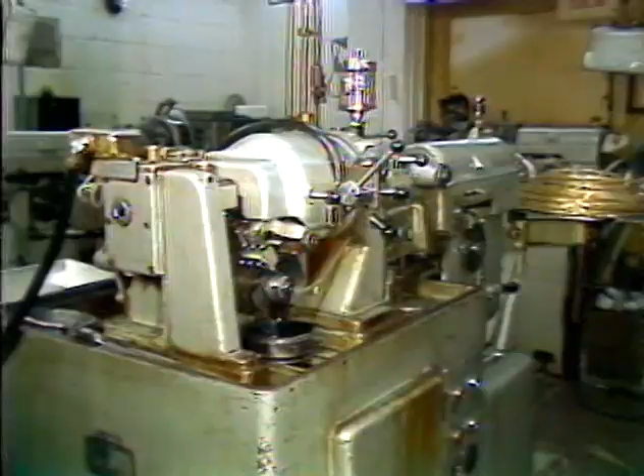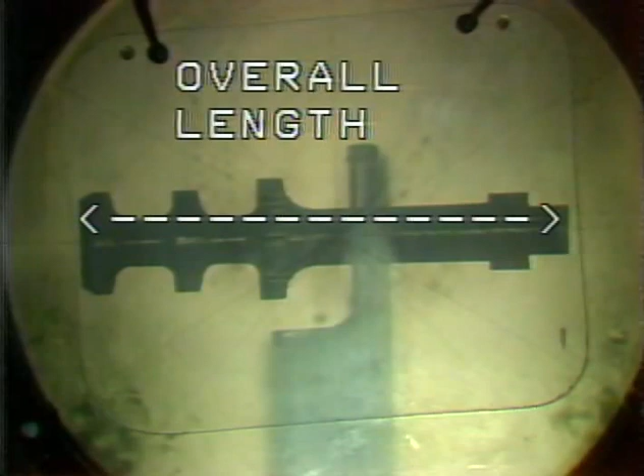After producing a few sample parts from your setup, check each part for proper dimensions against the part print. Check the overall part length and some of the major shank lengths. The major shank lengths are controlled by the feed attachment micrometer stop—these are the first feed out of the first feed cam and the first feed out of the second feed cam. Also check some of the radii.

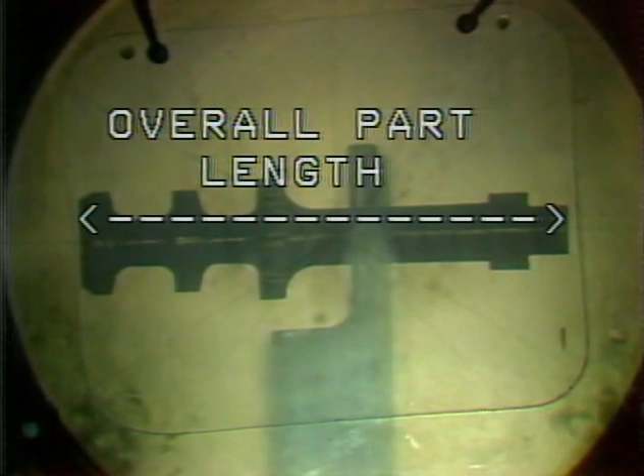The difference between these first few parts and the part tolerances will give you an overall idea of how the setup is producing parts. If only one feed cam is used, first check the overall part length.

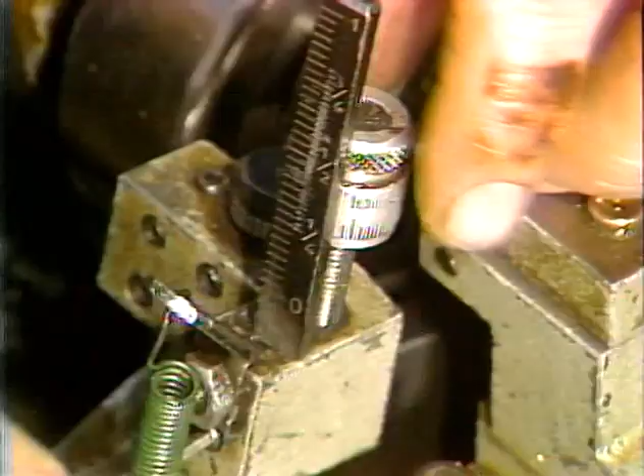Decide if the overall length must be increased or decreased and by how much. The length of the overall part will be adjusted by changing only the length of the first feed out of the first feed cam. If the part length must be increased, turn the feed attachment micrometer stop to the desired amount to correct the length.

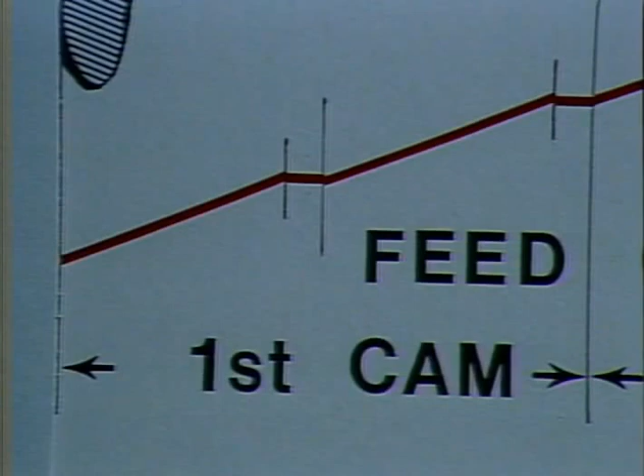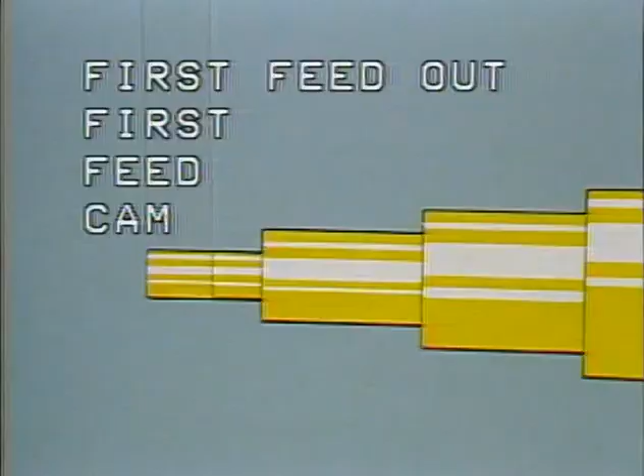This will allow the feed lever to return farther in its cycle, meaning the first feed cam follower will contact the first feed out of the first feed cam earlier in its cycle. The feed rolls will rotate more during the first feed out, increasing the feed out length and the overall part length.

Notice that the overall part length has increased, but only the dimension of the first feed shank has changed.

If the overall part length must be decreased, turn the micrometer stop the desired amount to correct the length. This will shorten the feed attachment return, causing the first feed cam follower to come in contact with the first feed out of the first feed cam later in its cycle.

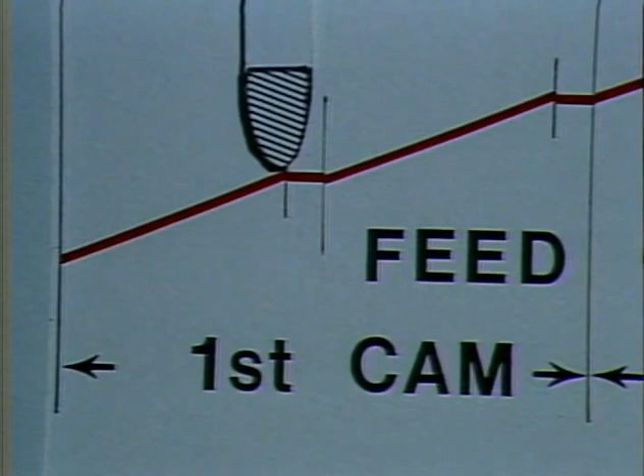The feed rolls will rotate less during the first feed out. The overall part length and the length of the first feed out shank will be shortened. Only the dimension of the first feed out has changed.

All other feed out lengths of the part being produced are fixed by the rises cut into the cam. Lengths and positions of shanks in the body of the part can be adjusted by moving the tool axial position.

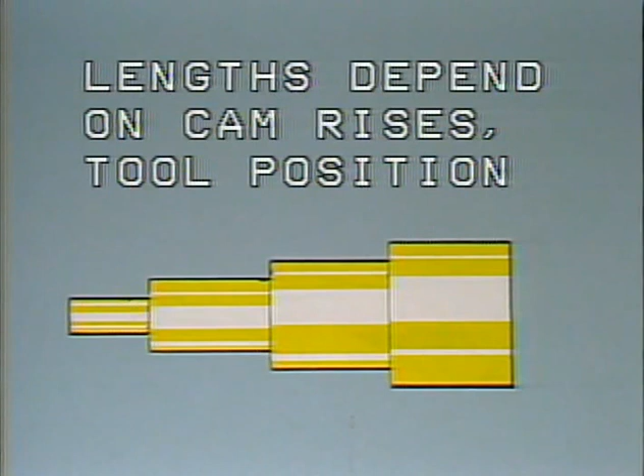If two feed cams are used, the second feed cam follower micrometer can also be used to adjust the overall part length and the shank length within the body of the part. Turning the second feed cam follower micrometer adjusts the length of the first feed out of the second feed cam.

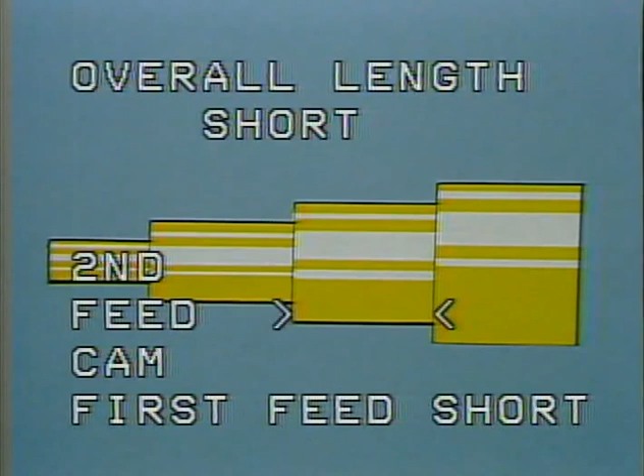If the overall part length is too short because the first feed out of the second feed cam is short, turn the micrometer stop to increase the length. This will cause the second feed cam follower to contact the first feed out of the second feed cam earlier in its cycle. This will lengthen the part.

Notice the overall length of the part has changed, but only the dimension of the first feed out of the second feed cam has changed.

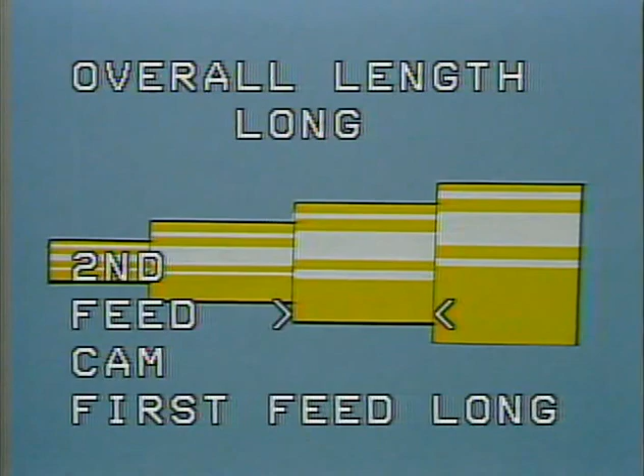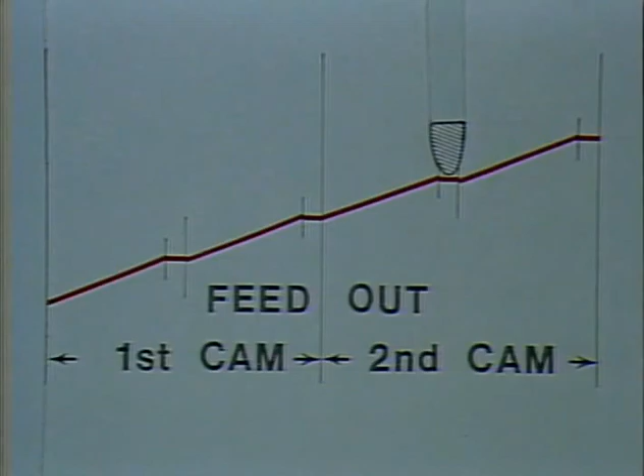If the overall part length is too long because the first feed out of the second feed cam is too long, turn the micrometer to shorten the part length. This will cause the second feed cam follower to contact the second feed cam first feed out later in its cycle. This will shorten the first feed out.

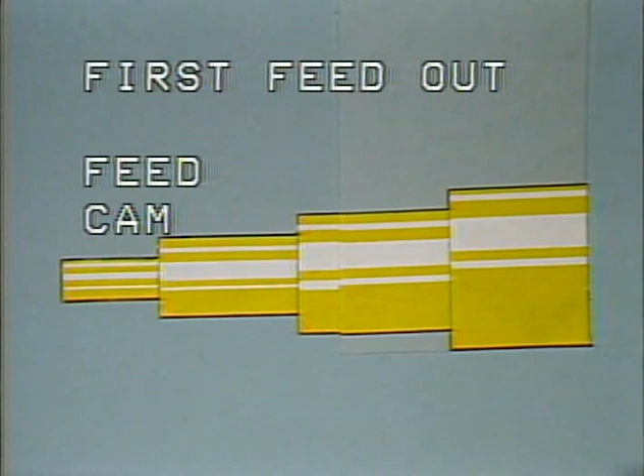The overall part length has been shortened. Only the dimension of the first feed out of the second feed cam has changed.

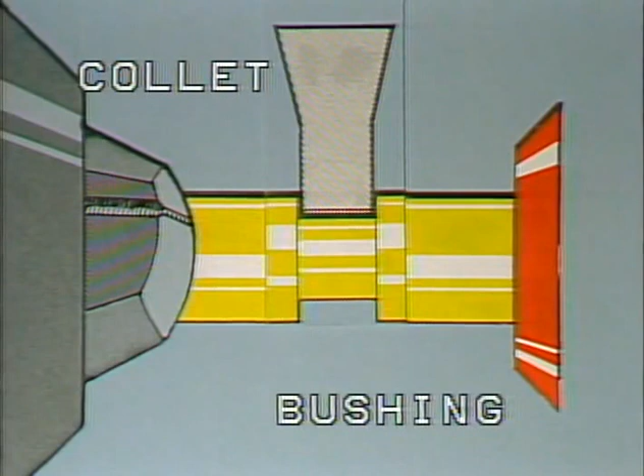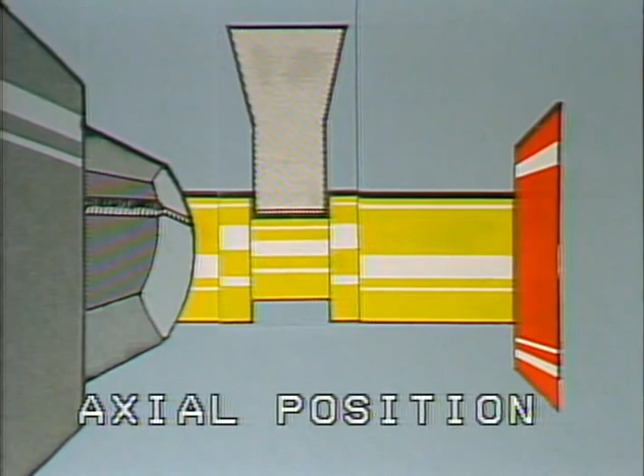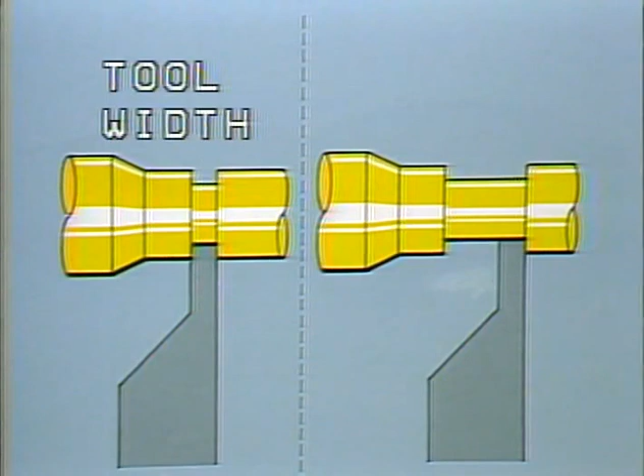With the overall part length correct, check the part for proper shank lengths. Shank lengths and the position of the shanks are controlled by moving the tool axial position. Also tool width, and a combination of tool width and stock feed out, will determine the shank lengths.

Moving the tool axial position toward the bushing will shorten the length of the shank between the tool and the bushing, while it will lengthen the shank toward the collet. Moving the tool axial position away from the bushing will have the opposite effect on the workpiece.

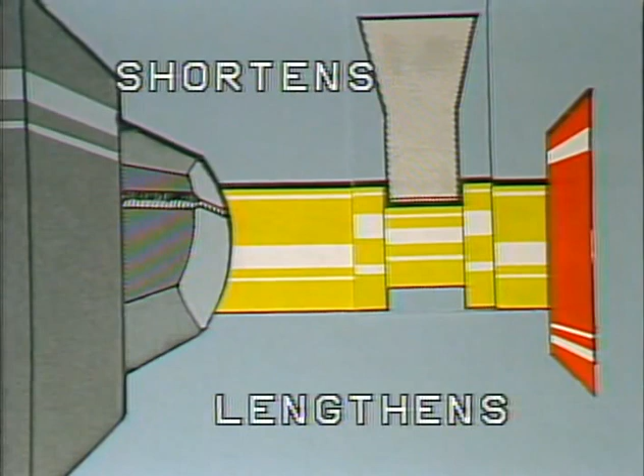Whenever the tool's axial position is moved, the clearance between the tools and the bushing should be checked and reset if necessary. The cutoff tool should be 2 to 4 thousandths from the bushing.

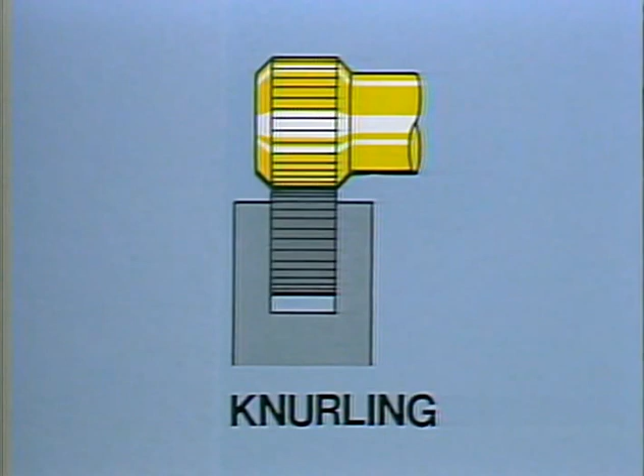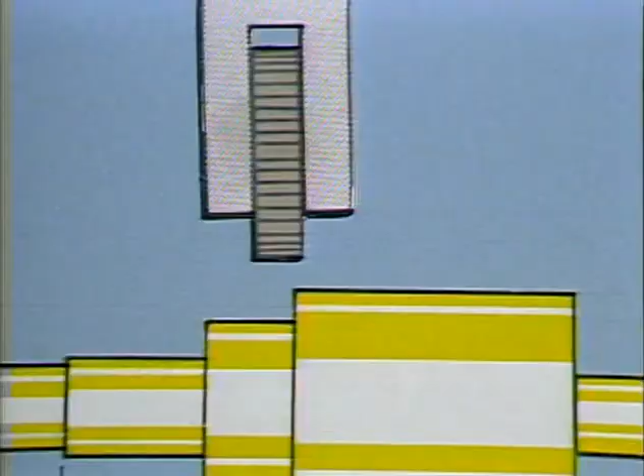If the part is to be knurled, the knurl tool axial position must also be set. Set the knurl tool axial position after the shank to be knurled is properly positioned on the part. Start the machine and allow it to run to the high point of the knurl cam. Stop the machine and adjust the knurl tool axial position to align with the proper shank.

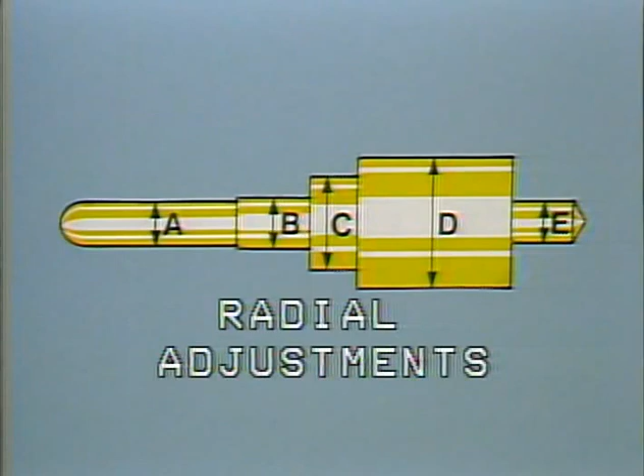With the tool axial position set, the cutting tool radial adjustments can be made. If the tool radial adjustments are more than 5 to 7 thousandths off, the tool safe distance must be reset before the tool micrometer radius adjustment can be made.

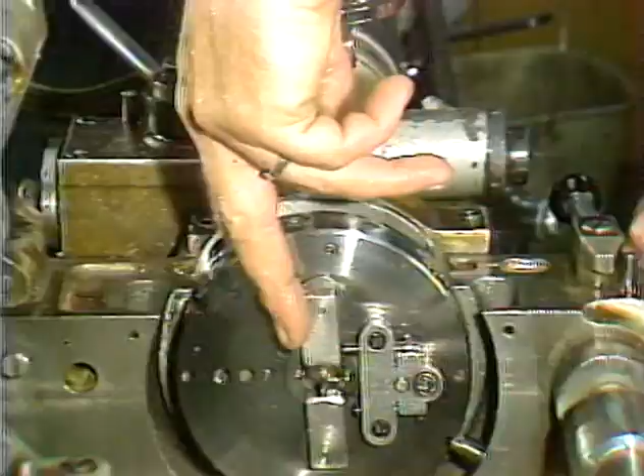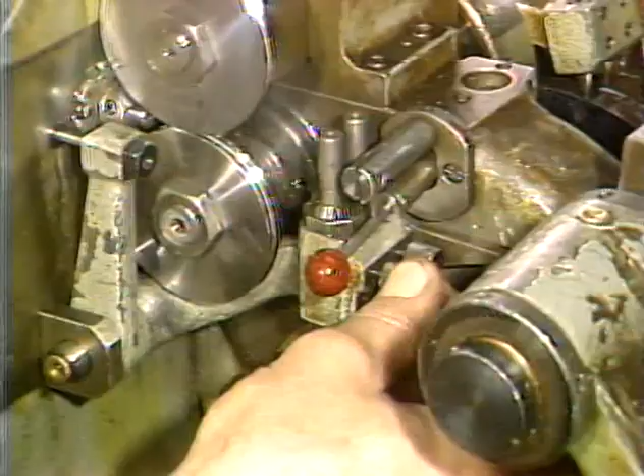You may have to compensate for tool movement when setting the tool safe distance with the distance gauge. With the tool cams at 0, turn the tool micrometer radius adjustment in the direction to correctly affect the part.

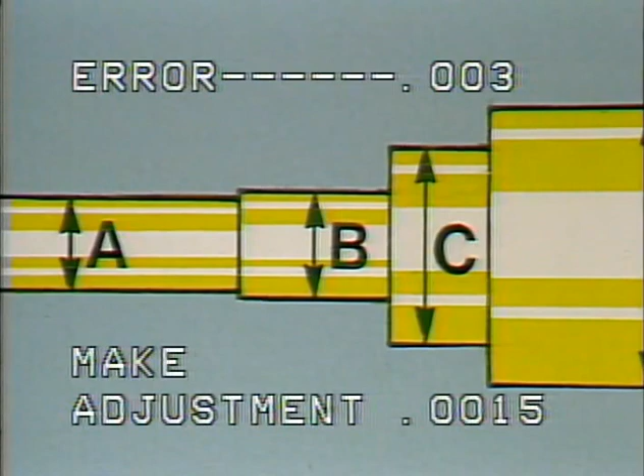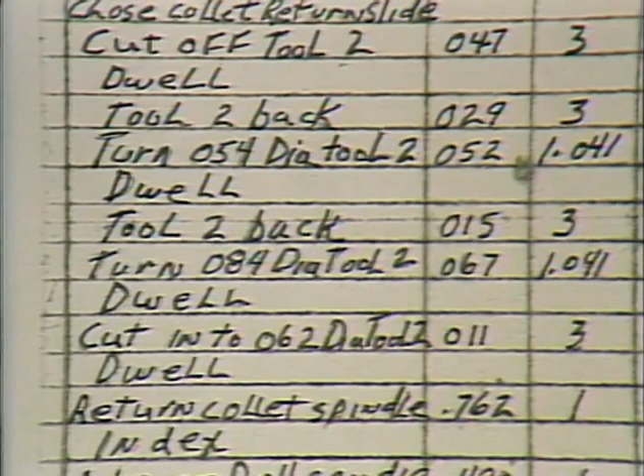Remember, adjust the micrometer by half the amount the setup is in error. Before adjusting the tool micrometer, check the layout sheet to make sure of which tool controls the dimension you wish to correct. Run a few parts and continue to adjust the micrometer until a part meets specification.

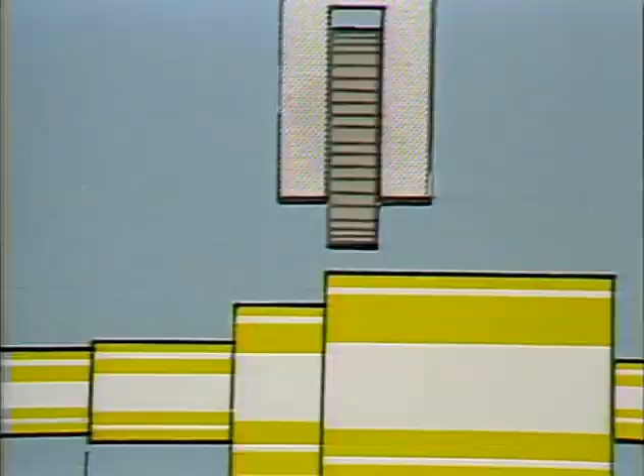Knurl tool radial adjustments can be made after the knurl blank is the correct diameter. First, run the machine to the high point of the knurl tool cam. Stop the machine. Adjust the knurl tool micrometer while holding the knurl tool counterbalance against the cone, until the knurl wheel just touches the part.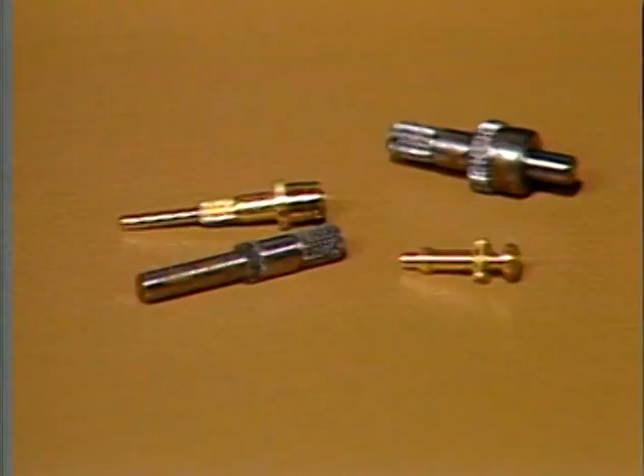Restart the machine. Run a few parts. Check the knurled portion of the part for proper dimension. Also check the part for the quality of the knurl. The knurl should be clean cut with no mashed or stripped spots. A knurl tool adjusted too deep will strip the knurl off the part.

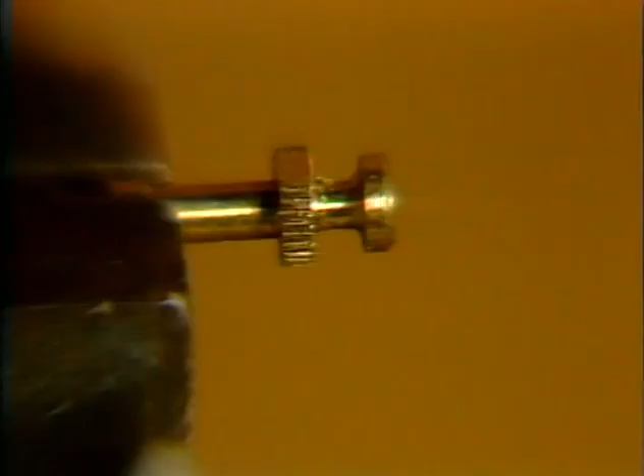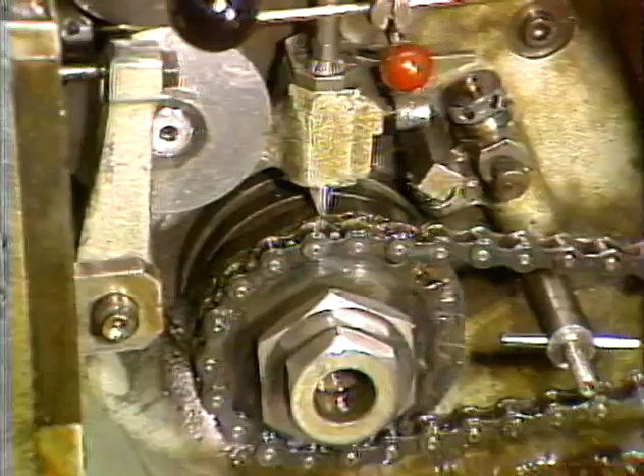To control a part diameter on some jobs, the tool cam number 2 positive stop may be used. This is usually specified on the layout sheet. Tool cam number 2 for this type of job is usually cut 2 to 4 thousandths lower than needed to cut the part. First, run the machine until tool cam number 2 is at low point.

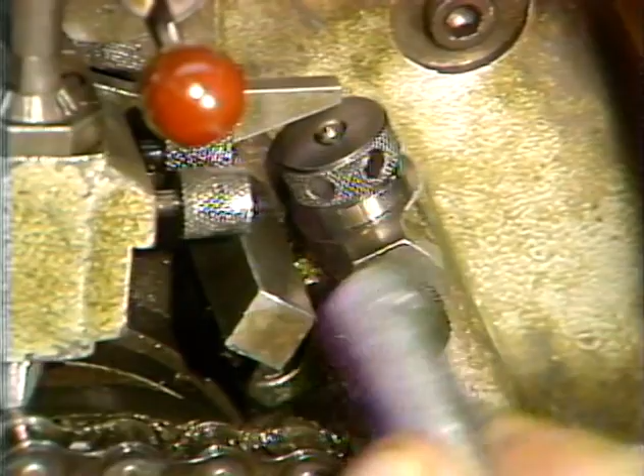Push the hand wheel in to stop the main camshaft. Adjust the positive stop to contact the positive stop lever. Continue to turn the micrometer another 2 thousandths.

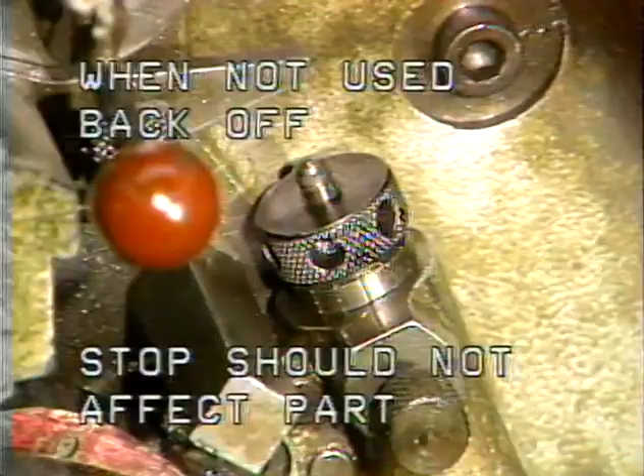Restart the main camshaft. Run the part and check the dimension on the part the positive stop was used to control. You can make fine adjustments while the machine is in operation. If the positive stop is not to be used on the job, make sure it is backed off far enough not to interfere with the normal operation of tool cam number 2.

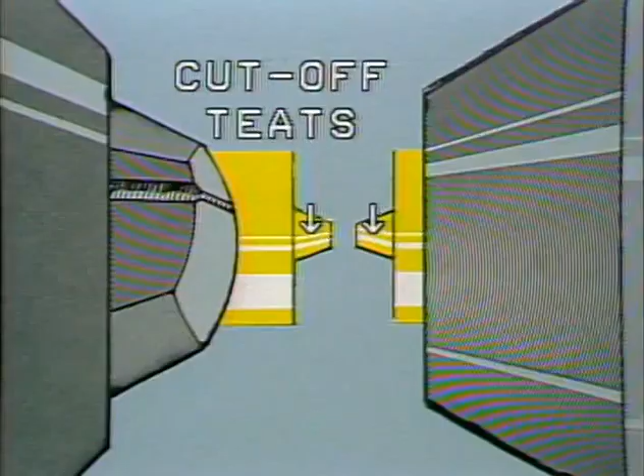When running the parts, also check the ends of the finished parts for cut-off teats. Also check the end of the stock and the bushing for cut-off teats. Some parts may have cut-off teats on both the collet and bushing side of the part. This may be caused from a poorly centered tool,

or insufficient travel of the cutoff tool past the center of the part. The cutoff tool may also be in poor condition. The cutoff teat on the collet side of the part may be caused from a cutoff tool in poor condition, or the collet may need further centering to the stock guide bushing.

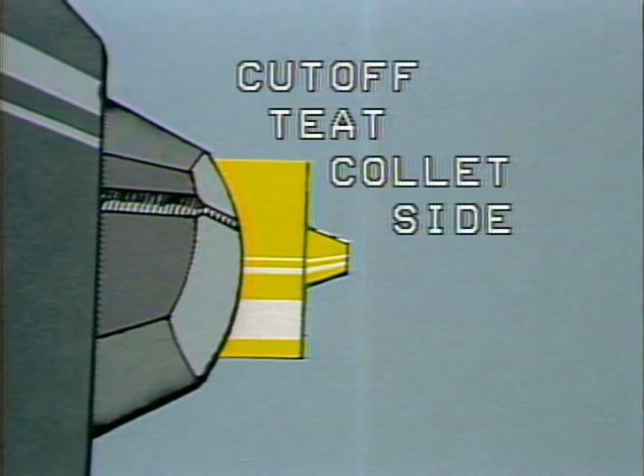A cutoff teat on the collet side of the part can mean a cutoff tool in poor condition, or the stock guide bushing may have too much play.

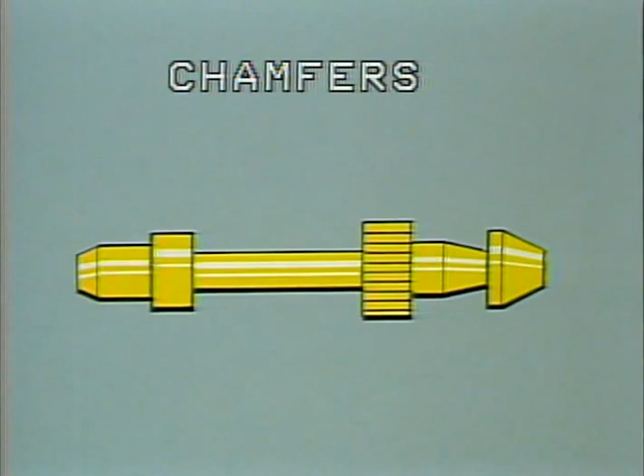Some parts may also require chamfers to be formed on the part. The chamfers should be checked for the right width, angle, and eccentricity. An eccentric chamfer is one that is not the same width around the part.

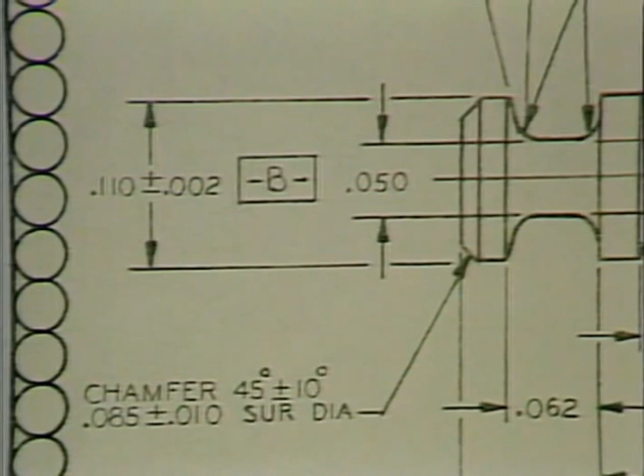The width of a chamfer can be controlled by the tool radial adjustment and by the tool axial adjustment. An eccentric chamfer on the bushing side of the part may be caused by the stock guide bushing with too much play, or a guide bushing that is worn unevenly out of round.

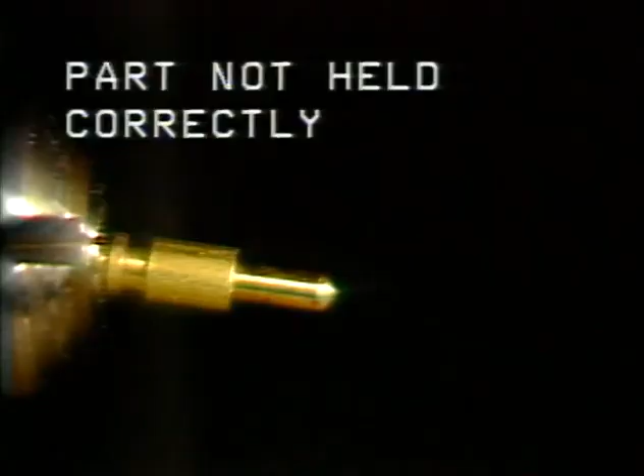A chamfer may be eccentric on the collet side. This may be caused by the collet not gripping the part firmly, or an enlarged collet which will not allow the part to be gripped correctly. Incorrect collet centering will cause an eccentric chamfer as well.

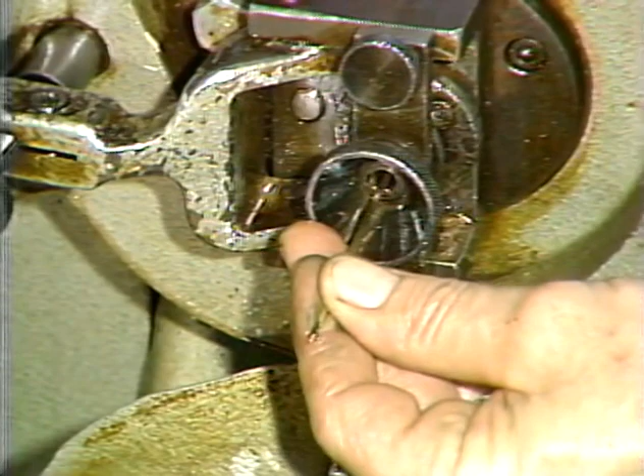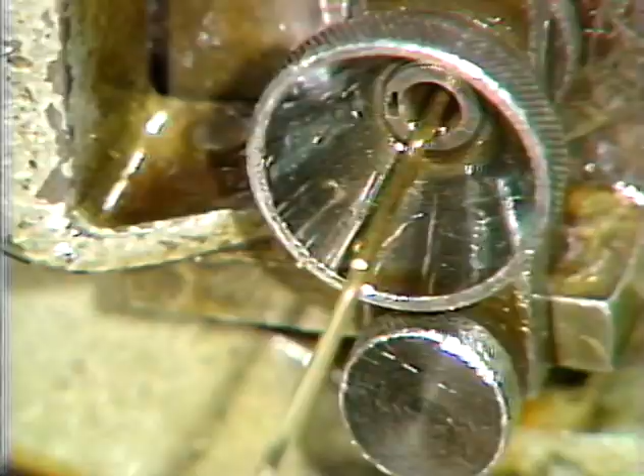To check which way the centering correction should be made in relationship to the collet on the Model D2, feed the stock through the collet and out of the back of the collet. Mark the top of the stock that extends out of the collet with a knife or file. Run the part.

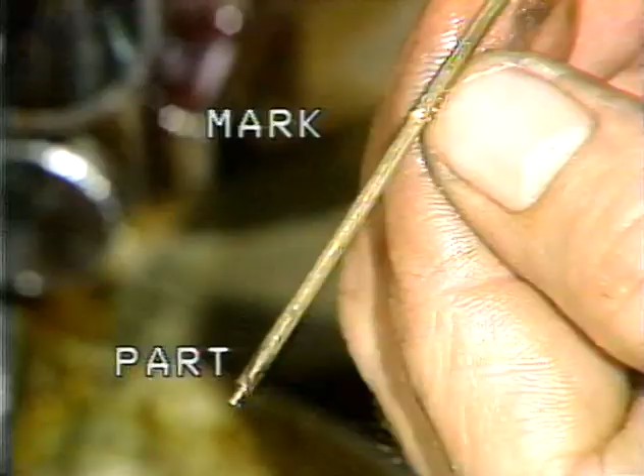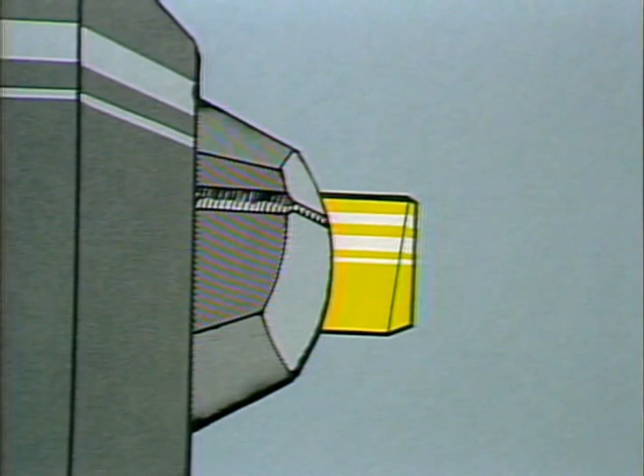Check the part on the end of the cut-off stock. Where the uneven chamfer shows up in respect to the mark on the top of the stock indicates which direction to move the collet. Move the collet in the same direction as the smaller chamfer, using the mark on the top of the stock as a reference.

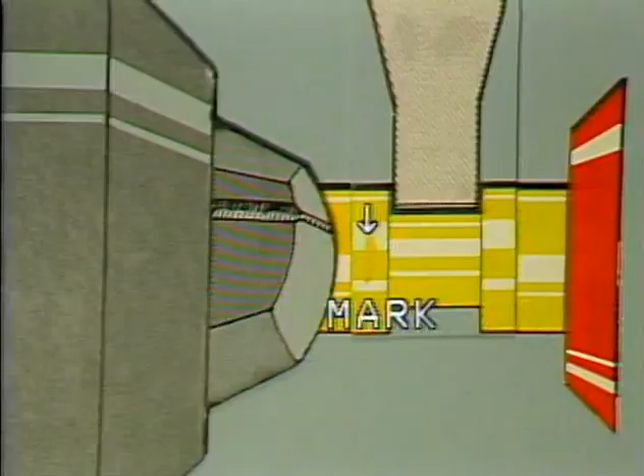The same check and adjustment can be done on the Model D4 by stopping the machine before cutoff and marking the top of the part in the tooling area. Then finish running the part. Move the collet in the direction of the smaller chamfer, using the mark on the top of the part as a reference.

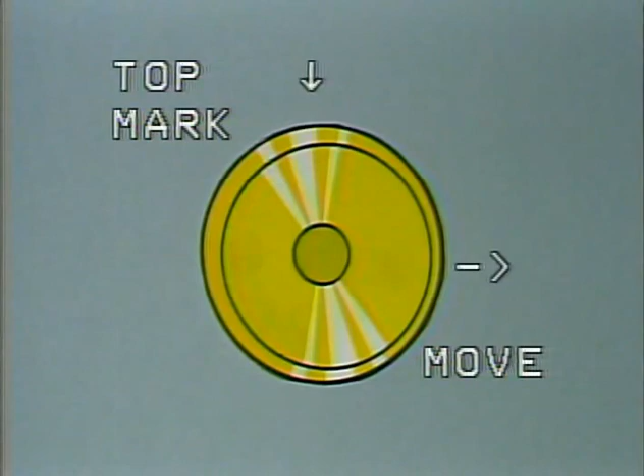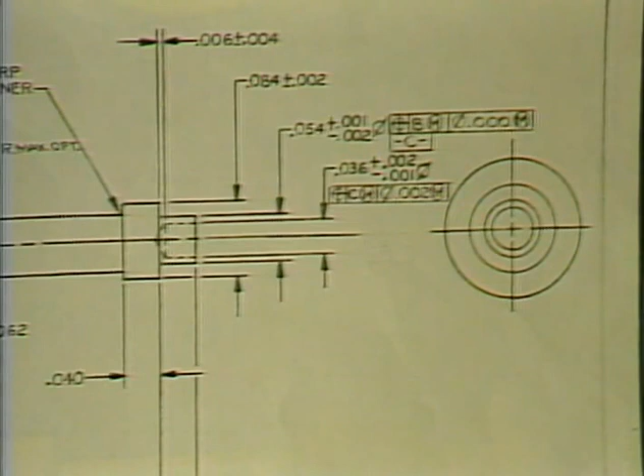Parts run on the Model D4 may also have to have drill hole dimensions checked and adjusted. Check the depth of the hole with the hole depth gauge. Drill depth is controlled by the drill micrometers.

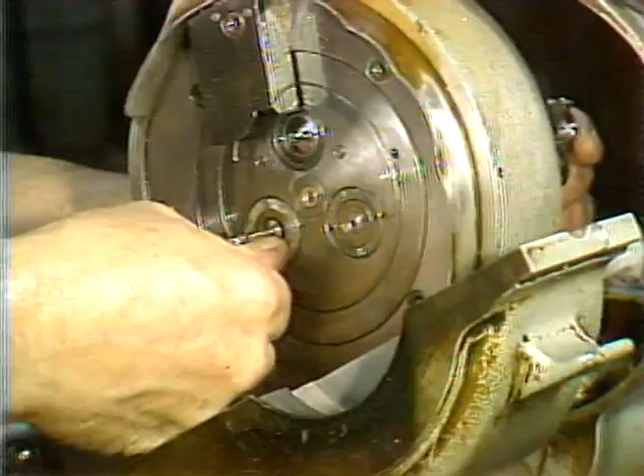If, after adjusting the drill hole, the followers are extremely out of balance, reset the drill dimension from the face of the collet to compensate for the extreme adjustment of the cam follower. Then reset the cam follower tips to be even.

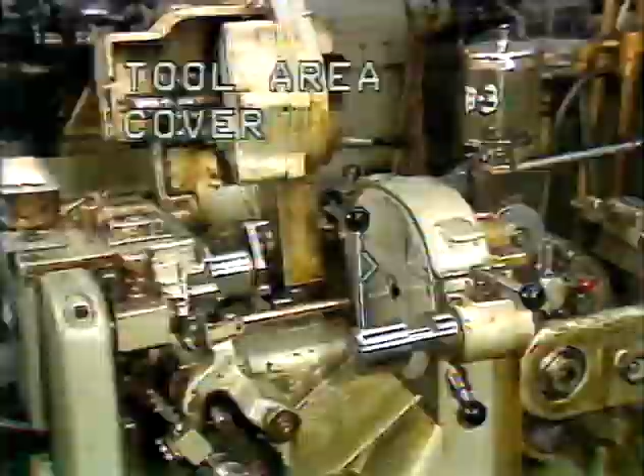Make sure after resetting the drill that the drill clears the tool area cover by at least 1 millimeter. Also check to make sure the contact roller clears the back of the spindles when the cam follower lever is fully returned. If the roller is not clear, damage may result when the machine indexes.

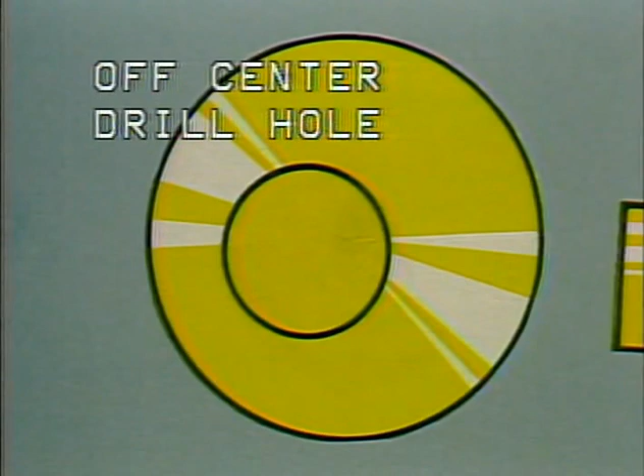Also check the drilled holes for correct position. If the holes are not within tolerance, the drill spindles should be recentered. To recenter the drill spindles, run the part and stop the machine before part cutoff.

Mark the top of the part in the tooling area. Restart the machine. Check the part for the position of the off-center hole. Using the mark on the top of the part as a reference, adjust the drill spindle centering in the direction needed to correct the part.